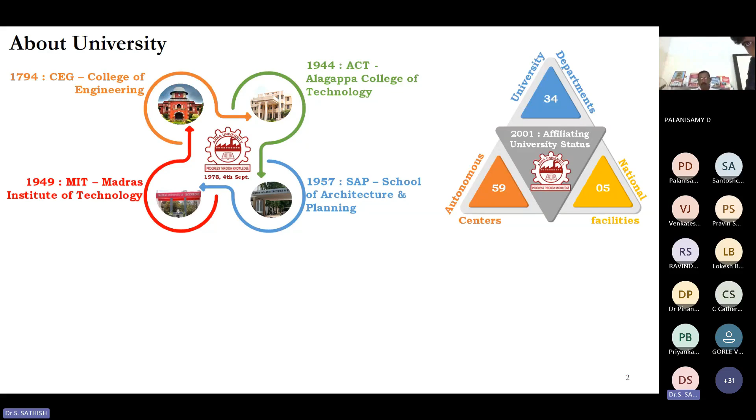Before going into the session, let me introduce our university. Anna University is constituted by 4 different campuses: College of Engineering, Madras Institute of Technology, Alagappa College of Technology, and School of Architecture and Planning. The institution has 34 university departments, 5 national facilities, and 59 autonomous centers. The university is accredited with NAAC A++ and also has a QS ranking.

Coming to the presentation, what is nanotechnology? I hope now people are moving towards nanotechnology. Before going into nanotechnology, let us know what nanotechnology is. When we discuss nanotechnology, each person will have separate definitions under their own perception. Similarly, different organizations have categorized what is nano, what is nanotechnology, and what is nanomaterials. When coming to nanoscale, the British Standards Institution has defined that when a particle size ranges from 1 nanometer to 100 nanometers, that will be called a nanoscale.

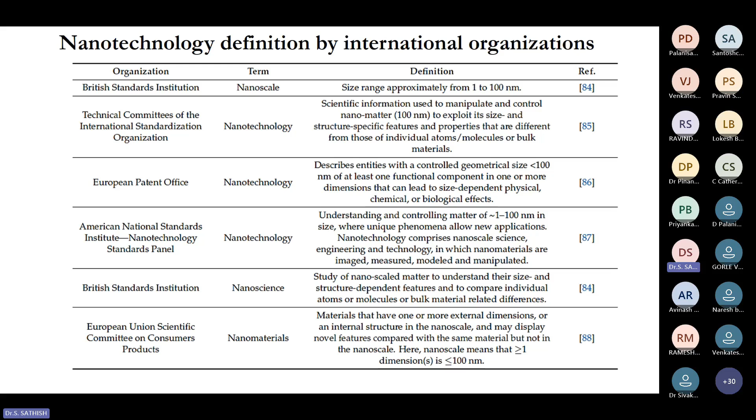In a similar way, the European Commission also defined that an insoluble or biopersistent, purposefully produced material under 1 to 100 nanometer size can be called a nanomaterial. There is also a definition by the European Commission for Novel Foods. So all these bodies define nanomaterials in different ways, but anyhow, it will be in the range of 1 to 100 nanometers.

Apart from that, engineered nanomaterials: if a material is purposefully made in order to obtain a nanometer level, then it is called an engineered nanomaterial.

In the same way, a nano object is when a material has one or more external nanoscale dimensions, categorized under nano object by the British Standards Institution. Similarly, nanoparticle, nanofiber, nanocomposite, nanostructure and nanostructured materials are defined by the British Standards Institution as mentioned here.

So do we think that these nanomaterials or nanotechnology have been developed recently? If you raise this question, definitely the answer is no. Though we have been focusing on nanotechnology and highly relying on it in recent days, people in ancient time periods utilized these nanomaterials in their existing practices, without knowing that it was nanotechnology.

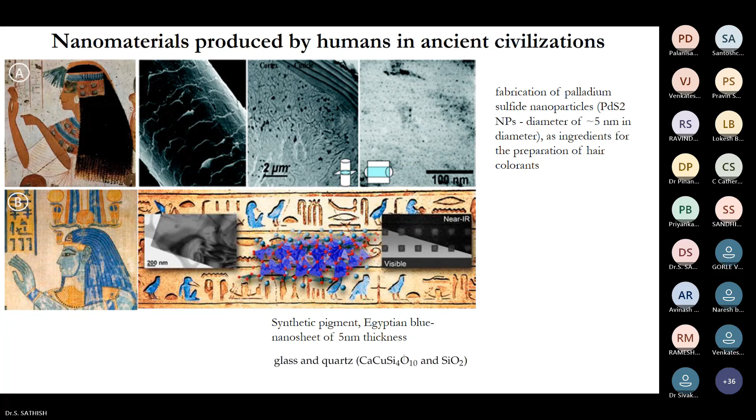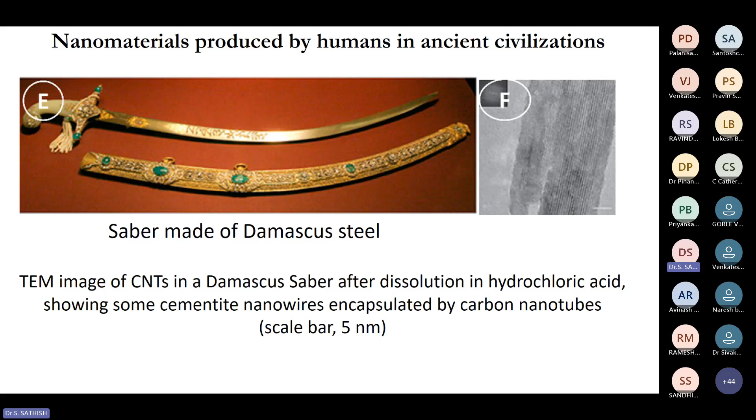Apart from this evidence, you can observe that particle size, nanoparticle size, morphology, and texture highly depend on or highly affect and influence the property of the material, particularly when focusing on functional nanomaterials. If you want to attain a specific property, the nanomaterial is the best choice to create or obtain such specific properties. Hence, these are called functional nanomaterials. Apart from conventional, regular, tailor-made materials, specific material properties can be obtained with these kinds of nanomaterials. This is proven by ancient applications, showing that nanomaterial is the right choice and can be utilized under different scenarios and applications to achieve specific property enhancement.

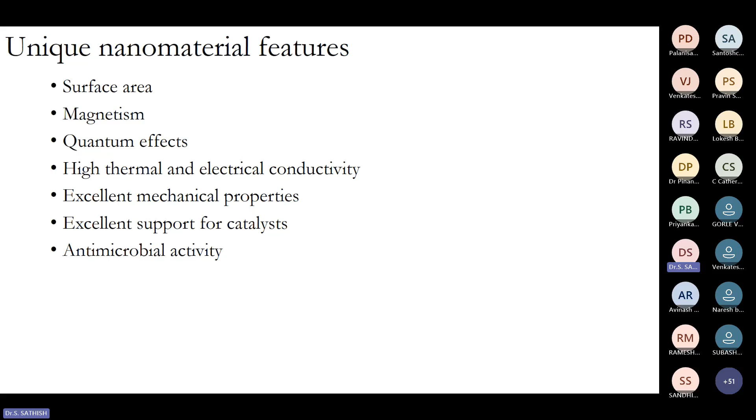Then common properties focused on the creation of functional nanomaterials: general mechanical properties supporting elevated tensile strength, thermal properties, physical properties, electrical properties, magnetic properties, catalytic, chemical properties, and optical properties. These are all properties that can be aimed at improving with the addition of nanomaterials.

Classification of nanomaterials depends on several factors: how a material will be categorized depends upon its structure, then its dimensions, then pore dimensions, then how the nanomaterial is originated, and then its toxicity. Based on these categories, nanomaterials are classified. Structurally, they are broadly categorized into carbon-based, organic, inorganic, and composite materials.

Carbon-based materials are the primary category. These may be in the form of fullerenes, graphene, carbon blacks, carbon tubes, or carbon fibers. Depending on the form, these are all categorized as carbon-based materials.

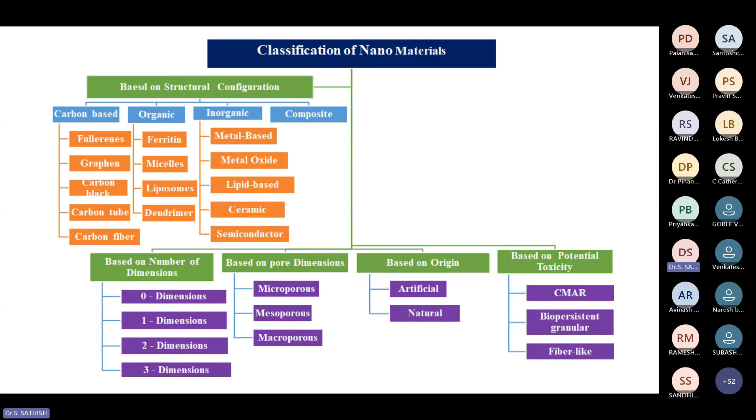Based on origin, materials may be artificial or natural, and they are categorized accordingly. Then there's potential toxicity - how it will behave. This includes CMAR and biopersistent granular and fiber-like particles, which all come under this category.

Though these have certain dimensions, the range is very negligible, hence they come under 0 dimensions. When picturizing 1-dimensional materials, they have X and Y dimensions in the range of 1 to 100 nanometers. Nano wires, nano rods, and carbon nanotubes can be called 1-dimensional.

Then 2 dimensions: it will have a definite length and thickness, showing 2 dimensions, also in the range of 1 to 100 nanometers. Nanofilms, graphene sheets, oxide sheets, and layered nanomaterials can be categorized under 2-dimensional materials.

Then 3-dimensional materials have dimensions X, Y, and Z in a considerable range of 1 to 100 nanometers, where dendrimers, bulk powders, and graphites are categorized under these 3 dimensions.

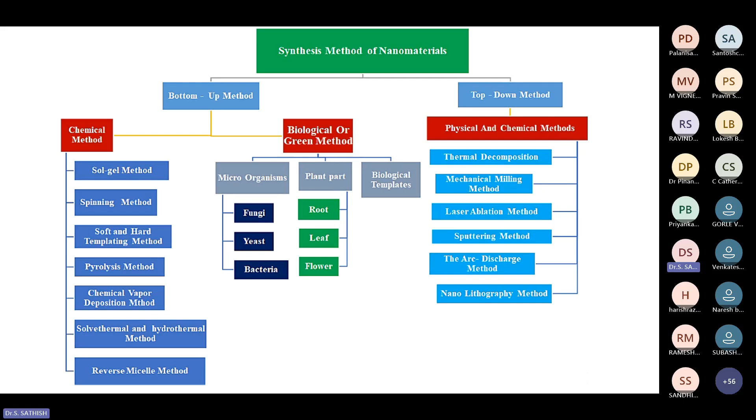So these are all some of the methods utilized under the chemical method process. When it comes to the top-down method, there will be thermal decomposition, mechanical milling method, laser ablation method, sputtering method, arc discharge method, and nanolithography method. These are all some of the methods that come under the top-down method.

So then what is a top-down approach and what is a bottom-up approach? The top-down approach is, if you can visualize, this is a bulk material that will be split into fine particles. That will be called a top-down approach. A higher particle size breaks into a finer particle size - that is higher size to lower size. That pictures the mechanical milling, laser ablation, sputtering, or electro explosion method.

Whereas in the bottom-up approach method, we are going to build in an additive manner. So smaller particles will get stuck together and it will be nucleated, and it will be further developed in order to get nanoparticles, nano range particles. So that will be called a bottom-up approach.

So now we are going to discuss some of the techniques utilized to realize nanoparticles. One of the most familiar methods in engineering will be the ball milling method. This will be a top-down approach method where the particles that need to be converted into a nano level will be taken at a micron level.

So micron level powders will be taken into consideration and this will be put into a ball mill. A ball mill is nothing but it will have rotating chambers called vials. Each vial will have the powders put into it, and in addition, balls will be added together. So why has it been rotated in this way?

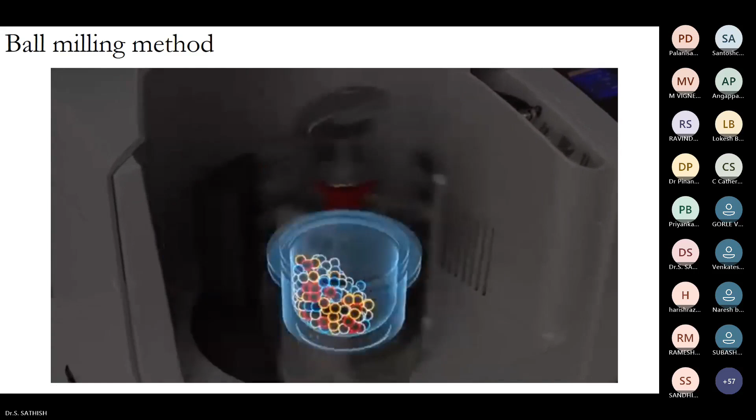Hope this video gives you a better insight on how the particle will be subjected to a centrifugal motion during the ball milling process.

So now the next one will be lithography. This will be utilized in order to create nanostructures. What are the different kinds of nanostructures that can be possible through lithography will be picturized here.

There will be suspended structures. You can visualize that there will be two supporting structures, and in between there will be a structured material made.

So next one will be 3D structures like an Egyptian model. Not only these kinds of structures, any kind of structures based upon the requirements can be made with this method. Then hybrid structures.

So a combination of two different structures can be made. These are some of the structures obtained with the help of lithography, in which the material is focused with the help of an ion beam, and this is implanted over a substrate.

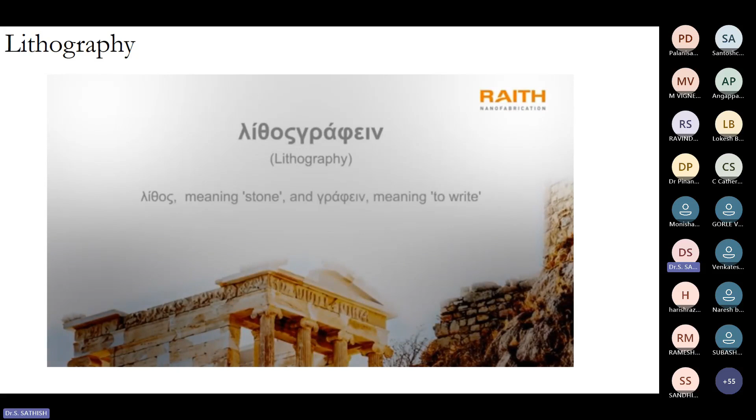With this technique, a stamp is made by carving a pattern into a stone. The stone is then coated in ink and pressed onto a substrate, such as paper. Similar methods are used when making small microscale devices, where a pattern needs to be made repeatedly on wafers.

The two methods used are called electron beam lithography and photolithography. EBL uses electrons to print, while photolithography uses light.

Both methods use an organic material called a resist, which is sensitive either to electrons or light, depending on the material used. A thin coat of this resist is applied to the substrate.

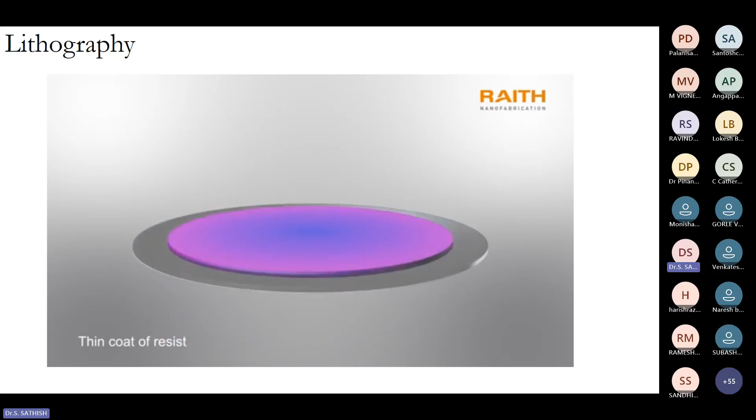In photolithography, the resist is exposed to light through a patterned mask that has been transferred onto the substrate. Wherever the mask allows light to reach the resist, a chemical reaction occurs, in which large resist molecules are broken down into smaller molecules. After exposure, the next step is called developing.

The area of the resist that has been exposed to light is removed by immersing the wafer in an organic solvent. The solvent dissolves only the small molecules that were produced during the exposure to light.

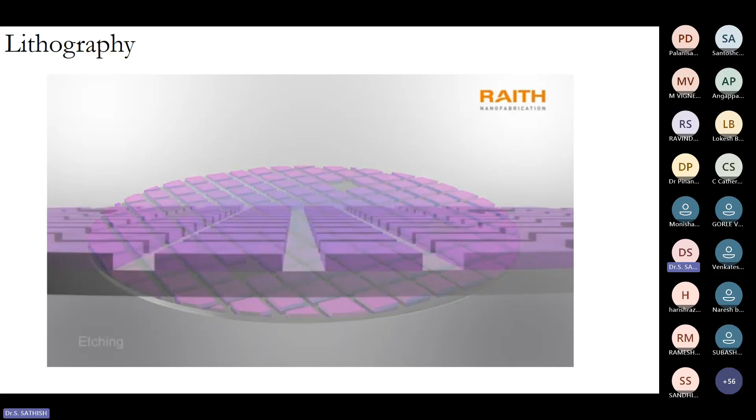Finally, the pattern is transferred onto the substrate using one of two available methods. Method 1 is etching, in which substrate is chemically removed from the pattern area that is not coated in resist. After etching, the remaining resist is removed, revealing the pattern etched into the substrate surface.

Method 2 is the lift-off technique, in which a metal layer is deposited over the whole of the wafer. The resist is then removed, taking the metal layer with it. The only area that now has a metal coating is the desired pattern, where the resist had previously been removed in the developing step.

Electron beam lithography uses the same process scheme, but a focused electron beam is used for exposure. The beam is accurately directed to positions on the wafer to form the pattern. The electron beam exposes the pattern dot by dot and line by line, which can be more time-consuming than photolithography.

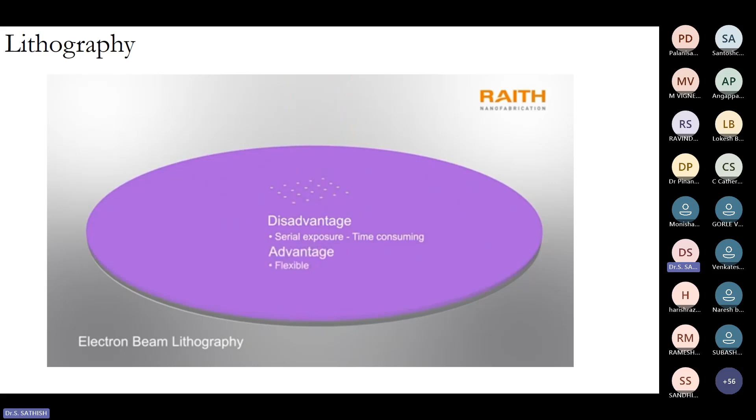However, it is a more flexible system and does not require expensive masks. The focused electron beam also allows feature sizes below 10 nanometers to be generated.

Common applications for EBL are rapid prototyping, small batch production, where electron beam lithography and photolithography are used in conjunction, as well as the fabrication of masks and imprint templates.

Hope you can understand how a lithography process will be made. So two different processes are explained here: one is electron beam and another is photolithography.

Both of these can be utilized to create nanostructures. But it highly relies on how accurate the process is, and the mask required will be different when focusing on photolithography versus electron beam lithography. When moving with electron beam lithography, you can have more precise and accurate structures compared to photolithography.

Then electrospinning - this will be another technique or method utilized to synthesize nanoparticles, particularly to create nanofibers. In this, there will be a syringe type system that helps focus the different materials, depending on what kind of nanomaterials we need to create. Majorly, it will have coaxial nozzles.

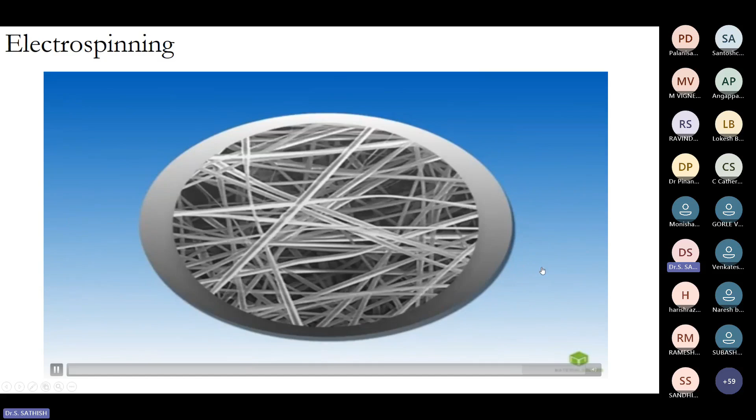So hopefully you have visualized how a material will be pumped from the syringe and moved to a cone, then made into fibers, and then collected on the collector plate.

So the next one will be your sputtering method.

In such a way, the nanoparticles will get coated over the substrate - this is the sputtering method. The video will give an insight on how sputtering happens.

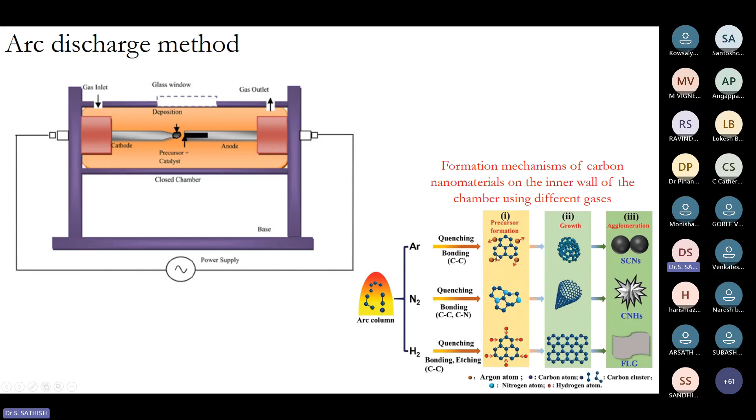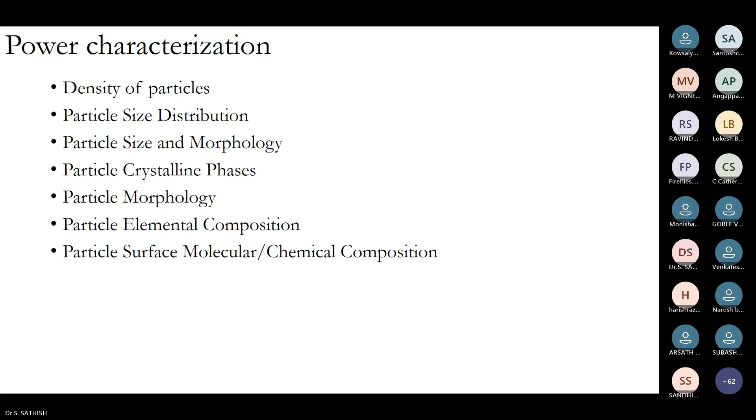So when it comes to density of particles, why do we need to understand these densities? It depends upon the density. If the material has a higher density, when it is subjected to additive manufacturing and poured over layers, these particles will settle at their respective position when forced or poured over a layer during powder bed manufacturing.

If the material doesn't have the required density, what will happen? It won't get filled in a uniform way, and there will be particle gaps that result in the production of porosity, with a very least amount of packing density. The entire surface that needs to be packed off and filled will not be properly filled, resulting in reduction of packing density.

In what way will this affect the part? This will result in the generation of porosity in the part you are going to make through powder sintering or powder additive manufacturing. It will also affect the green density, meaning there won't be proper consolidation between the particles when subjected to particle sintering. These are all the things that will affect the additive manufacturing component.

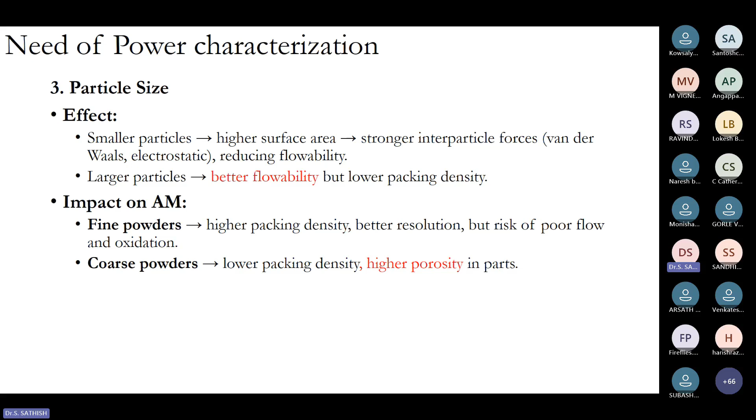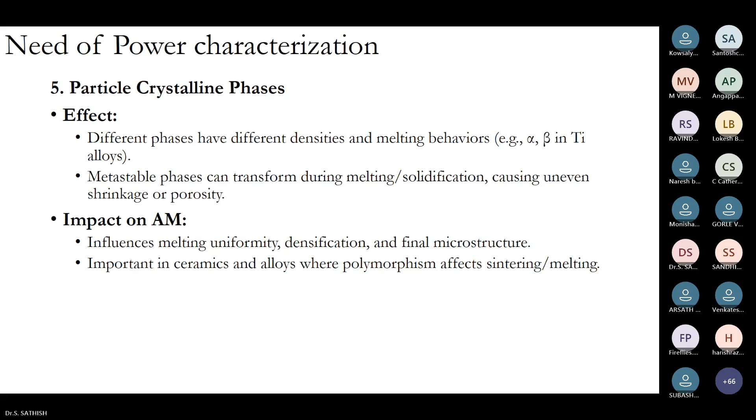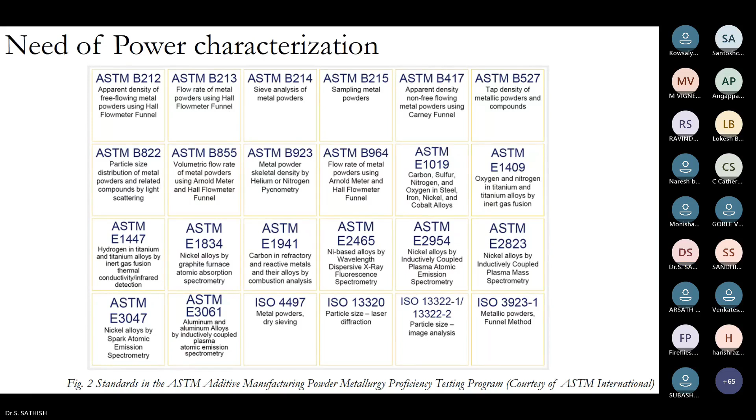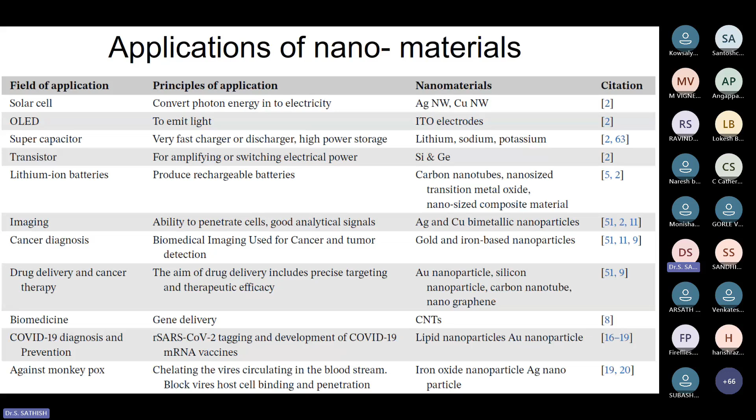Gold and iron based nanoparticles help diagnose cancer and tumors. Gold particles, silicon particles, and carbon nanotubes are utilized in drug delivery systems, cancer therapy, and medical industries. These are some specific application materials used in specific applications.

In the food industry, titanium dioxide is utilized. Then silicon oxide, zinc oxide, copper oxide, and magnesium nanoparticles are utilized in the agricultural industry as fertilizers, as antibacterial materials, and in high sensitivity sensors.

In all domains, it has applications in displays - carbon nanotubes are utilized in displays to create pixel-size level displays - in construction, cutting tool materials, energy sectors, and textiles. So in different domains, nanomaterials are utilized to enhance material properties.

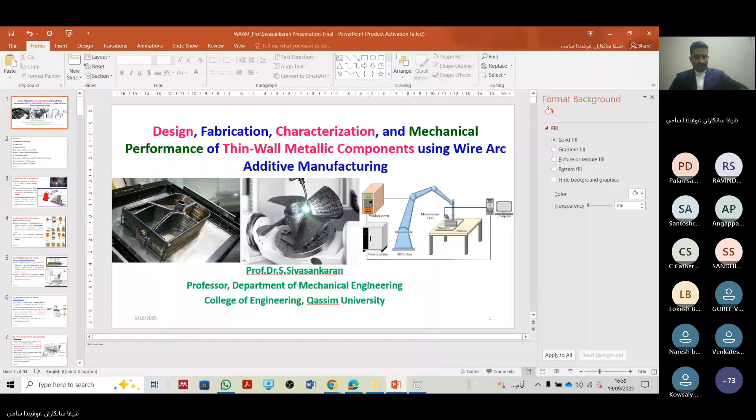Yes, yes, yes. Yeah. Okay. Right. Okay. Good.

So today I would like to share about my expertise and experience related to design, fabrication, characterization, and mechanical performance of thin wall metallic components, which can be produced via wire arc additive manufacturing.

Everyone knows that nowadays additive manufacturing is completely changing the advanced manufacturing sectors. Why? Because whatever complicated product you want to produce, either in the medical field, mechanical field, automotive component, or aircraft component, we can easily produce it via additive manufacturing.

Actually, it is not a new technology. In olden days, we used the additive manufacturing concept to make prototypes. But now, once the patents have expired, people are using that invented technology. Of course, there are many additive manufacturing technologies.

Wire arc additive manufacturing can give us a lot of benefits. It is a cost-effective technique, and moreover the deposition rate will be very high. For any large component, especially very thin wall and large components, wire arc additive manufacturing is the best choice.

For example, in a hull or any propeller, turbine propeller, if something gets damaged, we can replace just that particular part only. It is not necessary to replace the complete propeller. So that is the benefit of wire arc additive manufacturing.

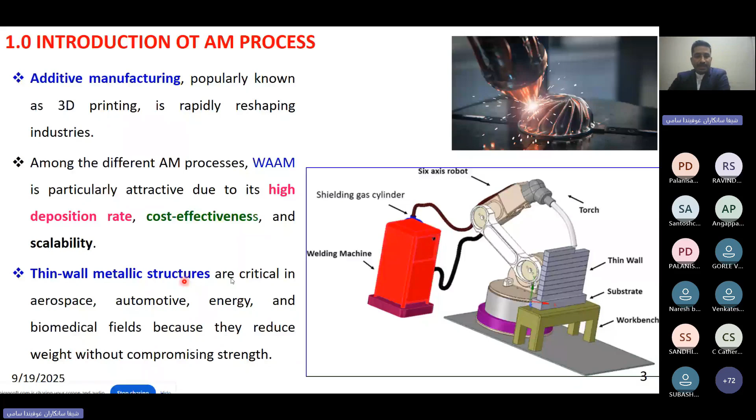As we discussed, additive manufacturing means we can build the product layer by layer. We just have to send the digital file to the 3D printing machines, and then it can start building the component.

As engineers, we should know the difference between additive manufacturing and conventional manufacturing. Additive manufacturing is a bottom-up approach, like the construction of buildings, whereas conventional machining follows a top-down approach, or subtractive concept, where we remove unwanted material from the product.

For conventional manufacturing, we need machine tools, rolling machines, forging machines, and we have to prepare molds - many things are needed. A lot of resources are used in conventional manufacturing processes, but in 3D printing it's not like that. Once we finish printing the component, we can do some heat treatment or post-processing, but apart from that, we can eliminate most of the resources we spend in conventional manufacturing.

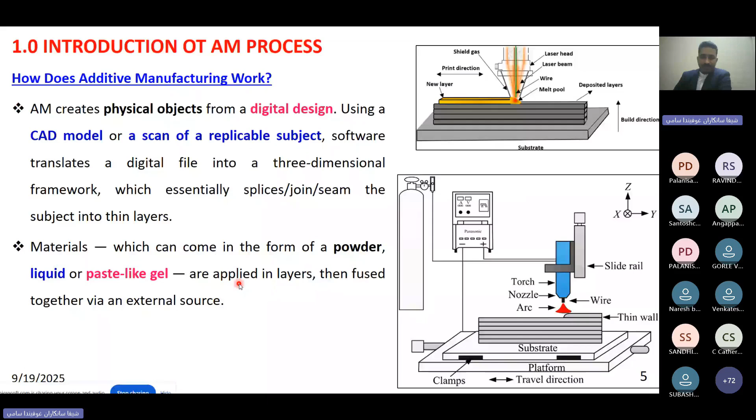Once we do the scanning, we get the CAD data from the scanner. Then the CAD file is converted into NC codes, which are sent to the machines for building the product. In additive manufacturing, depending on the type of machine, the raw material will be in powder form, liquid form, gel form, or filament form. There are different types of printers, and we will take an overall view of this technology.

Nowadays, 4D printing is also coming, and it's one of the best technologies. Whatever performance we expect from the component, we can program it in the 3D printing itself. Then when it's exposed to atmospheric conditions, heat, or environmental conditions, the product will start to perform accordingly. That means after printing, the product will change shape.

People are calling this 4D printing and doing a lot of research in this area. Based on heat, water, light, wind, or electricity, the product will change its shape. We cannot apply this to all materials - for example, shape memory alloys, smart materials, and self-healing materials can use this 4D concept. When a 4D component is exposed to atmospheric conditions, it can elongate, bend, wrinkle, fold, and twist, giving good performance. For example, in structural applications, if a crack appears in the smart material, it starts to identify itself, then expands and joins it. That is the concept of 4D printing.

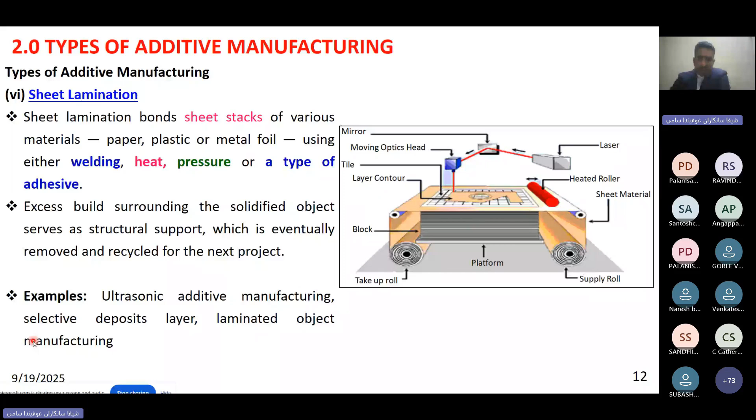There are many videos, and I think you might have watched or learned about them in the previous sessions. Let's focus on our topic.

You know very well that the applications of the additive manufacturing process are very vast. All the aerospace components, automotive components, healthcare and energy sector, consumer products. People are focusing on this area to develop a lot of real-time applications and real-time components.

What are the advantages we can get from the AM process? The best one is design freedom. In conventional manufacturing techniques, we have to design based on the facilities available and the machine tools available, so there is not much design freedom. But here, whatever product we want to design, we can print it. That is the plus point of the AM process.

Design freedoms. We can build any geometry possible in the CAD, enabling complex shapes impossible with traditional methods. That is the plus point of the AM process.

Most aerospace components and bioprinted scaffolds are examples of the AM process. High customization and lightweight components can be easily produced via 3D printing. We can optimize the geometry with less material, whereas conventional manufacturing involves a lot of wastage and scrap.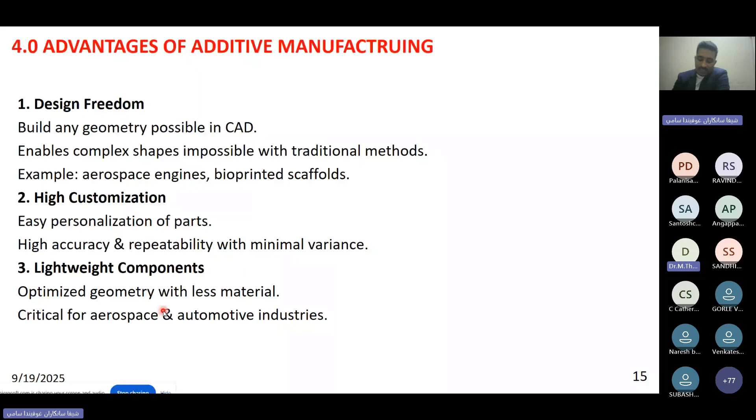This can be completely eliminated by means of the AM process. Further, low maintenance production - whenever there is an order, we can start production. For example, old manufacturing industries usually produce products in large quantities and have to store them in particular places. There will be a cost for inventory and degradation, but all these can be eliminated by the AM technique. That's the advantage of on-demand manufacturing.

We can produce sustainable and less wasteful products. So these are the main advantages of the AM process. And of course, even though you get a lot of benefits, there are some cons also.

We have to spend a lot of money on the machines - highly expensive, at least for a metallic printer you need to spend $200,000 to $500,000. Also you need raw material; for these machines we need specialized raw material. For example, powder has to be made in spherical form - only then can we ensure fluidity, otherwise we cannot ensure it.

Therefore, mostly gas atomization has to be used to produce the spherical form, or at least some spheroidization technique people will implement. It consumes an expensive technique to produce spherical powder, because ordinary powder cannot be printed. Filament manufacturing and wire manufacturing are also expensive techniques.

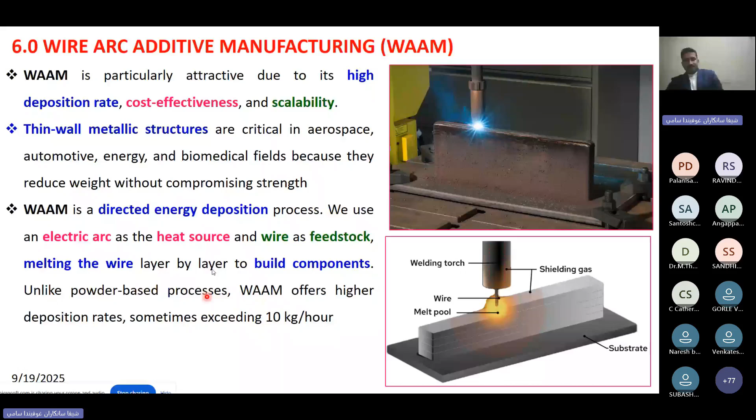Of course, there are some drawbacks. Surface finishing is a drawback in the WAAM technique, and accuracy is not as high compared to laser powder bed fusion systems. In the case of laser powder bed fusion technique, any complicated product can be easily produced via LPBF technique, with more accuracy and good surface finishing.

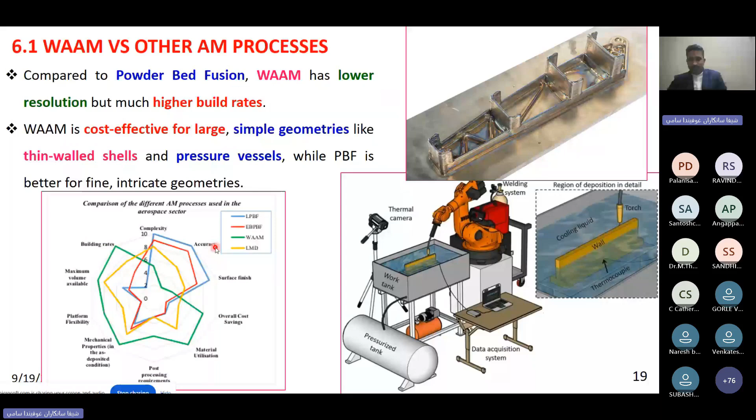Yes, so already I explained to you how the WAAM equipment works.

WAAM equipment consists of robotic arms or CNC gantry systems. There is a robotic arm, and at the top there will be a tipped torch, a welding torch. Inside, we can send the filler, either separately or together. There are IR sensors and cameras, and in order to have a proper feedback system, we can mount sensors. All the feeding system and the shielding gas supply system should be completely synchronized using the computer control systems.

Next, WAAM design aspects—what are the design aspects we have to focus on? Whenever we want to build thin wall cross sections, there are several design parameters we have to account for as engineers.

Suppose the build thickness is too thin—then the wall will collapse. Suppose it's too thick—then material will be wasted. So we have to optimize the thickness of the bead, that is, the wall thickness.

Apart from the wall thickness, there is layer height—now we are talking layer by layer—and bead width. If there is more bead width, there will be deformations along the longitudinal direction, that is, the deposition direction or build direction. There will be some deformations or deflections happening.

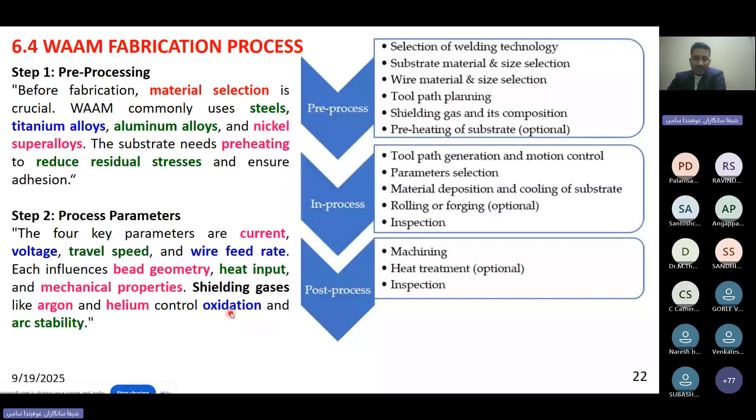Then process parameters - already we discussed current, voltage, travel speed, wire feed, bead geometry, heat input. All of these define the mechanical properties. Then there's selection of shielding gases, at least argon or helium, used to avoid oxidation. Also during WAAM fabrication, we have to ensure arc stability.

Then deposition strategies - this means you can do single pass build, or suppose you want to build large thin wall sections, with 2-3 heads: one head prints, then after some time, the second head prints, then the third - that is multi-pass deposition, also possible in WAAM technique. But before that, we have to ensure inter-pass cooling. If we don't do inter-pass cooling, then building the second layer with more heat causes more deformation, more deflection, and sometimes the weld structure will not be perfectly straight. That is the drawback, something to keep in mind when following deposition strategies.

Then real-time monitoring - whenever we want good build structures, we have to use closed feedback systems. If what's achieved doesn't match the design, we need closed feedback control systems. How can you achieve it? By placing cameras, thermal sensors, and other sensors, we can control the system and produce a good product. That is real-time process monitoring.

Next one is post processing.

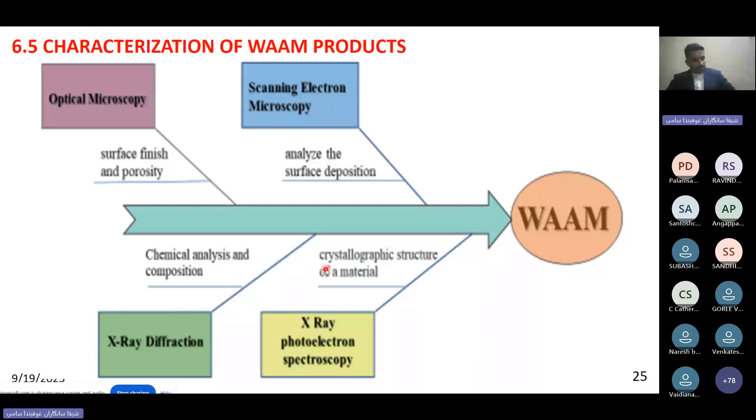One more point in wire arc additive manufacturing: as we build layer by layer, most of the component will have columnar grains and dendritic grains. Because of the build deposition, most of the microstructure usually will have a columnar grain and dendritic grain formed. This is the common microstructure that appears in the WAAM product.

You can see the pictures, SEM pictures. This is layer 1, there is a layer. The red line indicates the interface between the two layers, the interface between two layers. And you can see a columnar grain structure getting formed.

And still if you take higher magnification, you can see some metal carbides, some elements are segregated, presented inside the grain. They are called interdendritic grains. So these are the microstructures usually formed in WAAM processes.

Even with XPS technique, we can identify the presence of oxygen. Mostly whenever we want to do WAAM on titanium, we have to use proper shielding gases and shielding quantity, otherwise there is a pickup of oxygen.

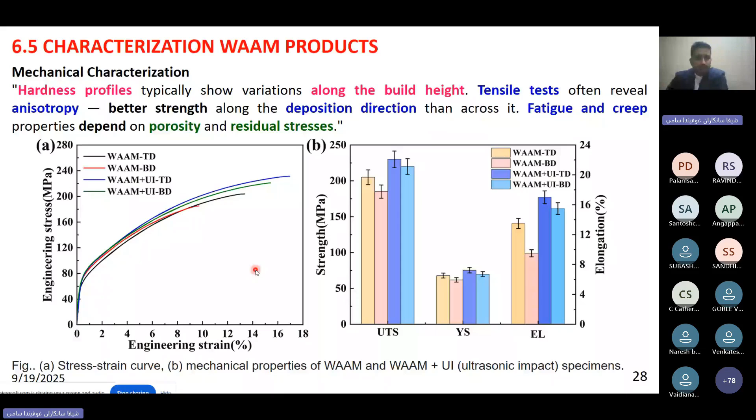Through X-ray diffraction, we can identify what phases are formed in the product. We can easily find out what phases are formed using X-ray diffraction.

EBSD, XRD, and CT scanning - these are the techniques by which we can properly characterize the WAAM product. Through CT scanning, we can measure the porosities, and porosity is not good. As much as possible, you have to minimize the porosity, then only the fatigue life or creep of the WAAM product will be very high.

Mechanical performance - I think most of the concept we have already discussed. As I told you, anisotropy in WAAM means the property will be different with respect to directions. That is a drawback. Layer-wise WAAM will offer anisotropic mechanical properties. The vertical build direction can show weaker interlayer bonding compared to the horizontal direction along the deposition or transverse directions.

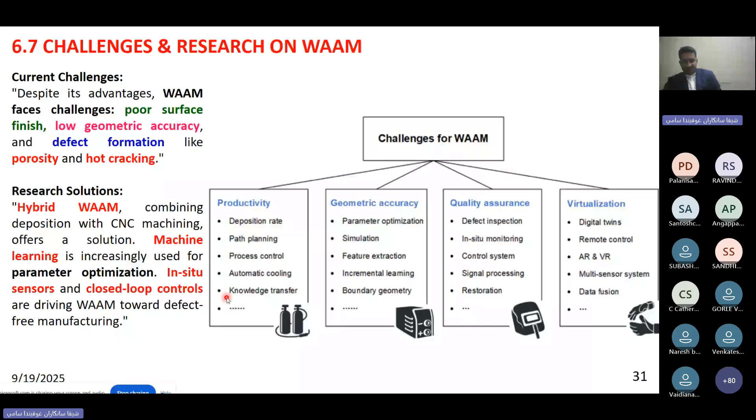Now WAAM also has many categories.

I think 4 or 5 we will discuss it here through this one. Anyway, it's not a new technology. Before we used gas tungsten arc welding, we have used MIG welding, plasma arc welding. From this only electron beam welding developed, and from this only people developed the concept.

So gas metal arc welding based WAAM, gas tungsten arc welding based WAAM, plasma arc welding based WAAMs. This is what gas metal arc welding based system, already discussed. For example, principle of operation of gas metal arc welding operations.

Here, the filler wire has to be passed on the welding torch, connected to the power supply. That means continuous consumable wire electrode has to be fed through the welding torch nozzle. Then workpiece will be placed, that means there is a substrate. It is also connected to the power supply, and there is a shielding gas system also connected.

So based on the programming, based on our design and drawing, the wire will be fed down towards the surface where there is initially no workpiece. The moment it's coming near, the arc will be generated. Once the arc is generated, melt will happen, it will be deposited on the particular area, and immediately there is a synchronous motion, it will move to the next point. So electric current is struck between the wire tip and metallic substrate. That's the gas metal arc welding based WAAM technique.

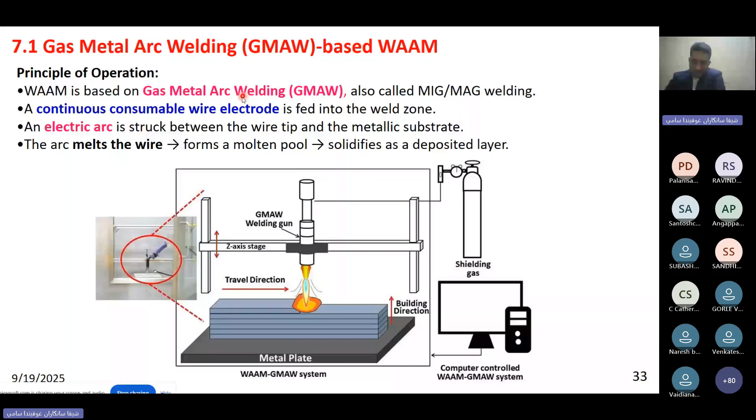So here, the deposition process: first wire feeding, then arc formation will be carried out. For arc formation, you have to use a proper stable electric arc between the wire tip and substrate. Proper voltage and current has to be given to the machine, and we have to properly send shielding gases. If you send too much, it's not good; too less, there's a possibility of deformation, more heat, and more oxygen and nitrogen pickup.

Then arc formation, then layer by layer build up, then finally cooling between the passes, which is called interpass cooling. These are the steps involved in the gas metal arc welding based wire arc additive manufacturing technique. In GMAW-based WAM, the metal transfer mode is important, like in welding. There are basically 4 metal transfer modes.

One is globular mode. That means the filler wire will come and make the arc, then a sphere forms, melt will be formed, and it will droplet out by means of gravity. Usually the droplet diameter will be larger than the diameter of the filler wire. So that is globular metal transfer.

Globular metal transfer has unstable spatter. This will occur at low current, low voltage conditions, where this kind of melt transfer will occur.

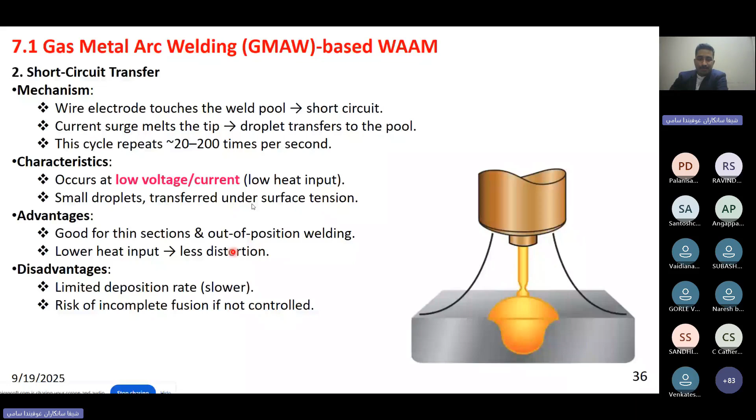Then there's spray transfer - both spray transfer mode and pulse spray transfer mode. This is recommended for the WAAM technique. Here high voltage and current are usually applied to the system.

Spray transfer means because of the supply of high current and high voltage, the moment the filler comes, there is a gap. Immediately the arc is formed and the melt pool is formed. The diameter of the melt pool will be very small compared to the filler wire, meaning the droplet size is smaller than the electrode diameter. Because of the high current and high voltage, the deposition rate will be very high.

Minimum 100 to 200 cycles per second can be achieved. That is the plus point of spray transfer: high deposition rate, deep penetration, stable arc possible. Whenever you want thick sections, not thin walls, we can go for spray transfer, but it also produces a lot of heat affected zones, which is a drawback.

Then there's pulsed spray: here the current alternates high current, low current, high current, low current. Accordingly the arc is generated, and the melt part is forced downward. That's what they call pulsed spray transfer, using pulsed current waveforms. Whenever high current is there, the melt pool is formed; whenever low current is there, it is forced downward. That's the pulsed spray transfer technique.

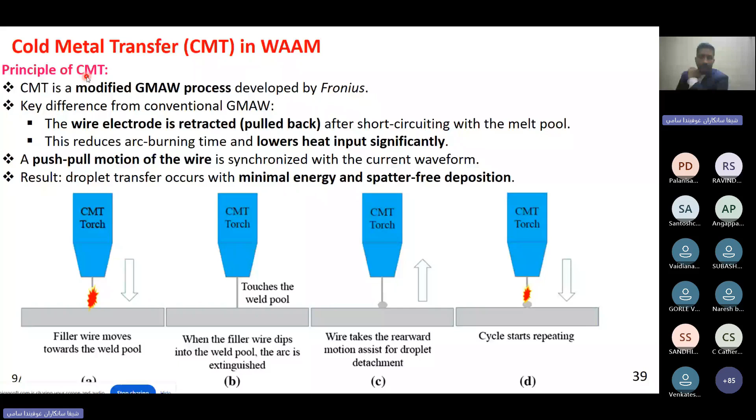I also observed many articles - whoever applied CMT technology in building WAAM products got good quality and good mechanical properties. That's what the next slides show.

In the CMT based WAAM technique, the wire approaches the weld pool and creates a short circuit. The current is reduced rapidly. The moment the arc is extinguished, the current becomes less, preventing overheating. Then the wire retracts slightly up, so the melt part detaches from the wire and is dropped. That is the working of cold metal transfer in WAAM.

They mention the cycle repeats 100 plus times per second, so 100 droplets per second are formed. When compared to other metal transfer technologies, CMT is the best one - low heat input, because it reduces the molten pool, so the heat input spreading is minimized. That is the plus point of low heat input. Also improved surface finishing, enhanced material properties - if we have a good microstructure we get improved material properties - and better for thin wall fabrication, even 1 to 2 millimeter very thin walls can be fabricated via cold metal transfer technology. We also get more energy efficiency from the product.

There are some challenges also: complex equipment, since we need to synchronize the push and pull motion of the wire, so equipment synchronization is somewhat difficult compared to other WAAM equipment. It requires an advanced digital power source and wire control. The deposition rate is somewhat slower compared to other techniques, and the process is highly sensitive.

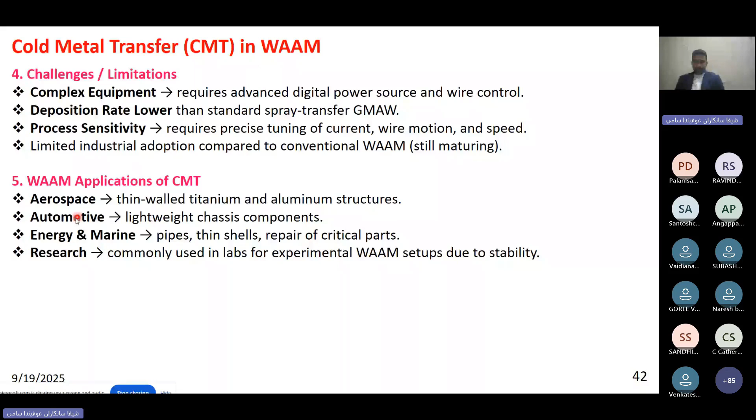Next, gas tungsten arc welding based WAAM technique. It's similar to before, but here tungsten electrode will be used as the electrode. Wire will not act as electrode here, it will only act as a feeder. That's the difference between the previous one and this one.

Here, because of using the tungsten arc, the arc will be somewhat narrow compared to the previous one, and good surface quality can be achieved from the gas tungsten arc weld based WAAM technique. I hope you can understand the basic concept.

Here the challenge is synchronization - we have to maintain a constant gap between the tungsten electrode and the substrate or previously built part, keep feeding constant, and synchronize the gases and travel. All these are highly challenging. But what I observed is we can have good quality when compared to the gas metal arc weld based WAAM technique.

Arc initiation, wire feeding, layer by layer deposition, build deformation - these are the usual steps involved in the technique.

Advantages of gas tungsten arc weld based WAAM: stable arc, high quality achieved, and very good surface finishing - quality product can be produced via this technique. Any material can be flexible because here filler does not act as the electrode. Even reactive metals can be easily built - titanium, aluminum, nickel alloy is highly suitable, and there's a small heat affected zone compared to the previous WAAM technique.

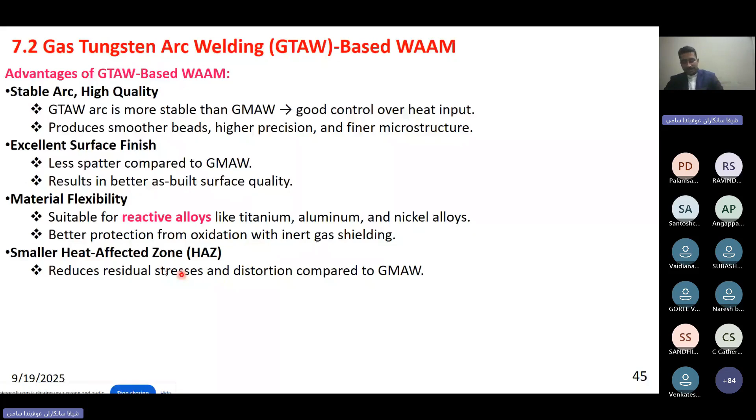Of course there are some drawbacks. Deposition rate will be somewhat lower - for example, 6 to 10 kg per hour can be achieved in the gas metal arc weld based WAAM technique, but here only 1 to 3 kg, making it less suitable for very large builds. There is also process complexity because we need to synchronize the wire, gases, and welding torch, and equipment costs will be high.

Then, plasma arc welding based WAAM technique. Here a constrictive arc will be there, and we have to pass plasma gas through it. Whenever the plasma gas passes through the constricted arc, it gets ionized - this is called plasma gas. There are 4 phases: solid phase, liquid, gas phase, and then plasma phase, the plasma state. At that high state, the plasma state, temperature will be very high.

Only thing - in the plasma arc welding based WAAM technique, we can maintain a constrictive, very narrow arc compared to tungsten TIG welding based WAAM technique or gas metal arc welding based technique. Here we can maintain a constrictive narrow arc by which we can minimize the heat affected zone and build good quality WAAM products. That is the plus point of the plasma arc welding based WAAM technique.

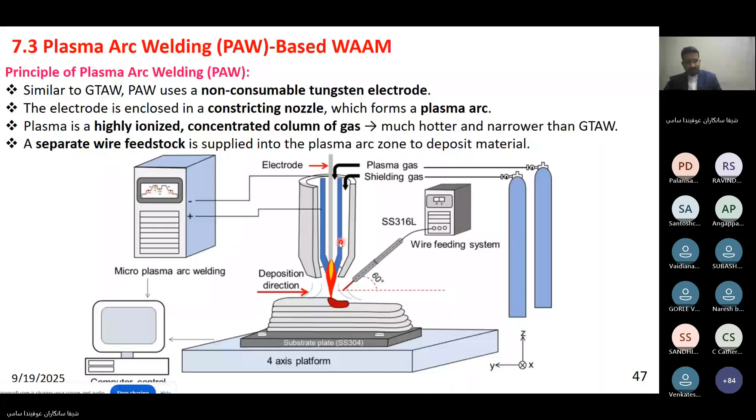Anyway, it's related to plasma arc welding only. Arc generation, wire feeding, layer deposition, controlled heat - these are the steps involved in the plasma arc based WAAM technique. Here high energy density - once the plasma is generated, the temperature will be around 10,000 to 20,000 degrees centigrade.

So the energy density will be very high, almost 3 times higher than the gas tungsten arc weld based one. High energy density can be achieved, and moreover we get a narrow arc, narrow droplet - that is good for the product. So better control, precision, good surface finishing, lower distortion and heat affected zone compared to the previous technique. This is the plasma arc welding based thing.

Of course there are some drawbacks: lower deposition rate, equipment cost will be more, and the process will be somewhat complicated. Applications are very wide. Then multi-wire WAAM machines are also available.

Multi-wire system is also available. With single wire feeding, there are some drawbacks we have observed in the WAAM technique, so for that we can use a twin system - we can feed 2 wires in a single nozzle, or use 2 nozzles. We can have two nozzles mounted on robotic arms, separate robotic arms, and we can synchronize them.

Okay, so that's the multi-wire arc based WAAM technique, by which we can improve the deposition rate. So building will be very fast, and whatever alloy, suppose any new alloy we want to develop, thin wall cross section, or we want to build a metal matrix composite based thin wall, we can able to build it.

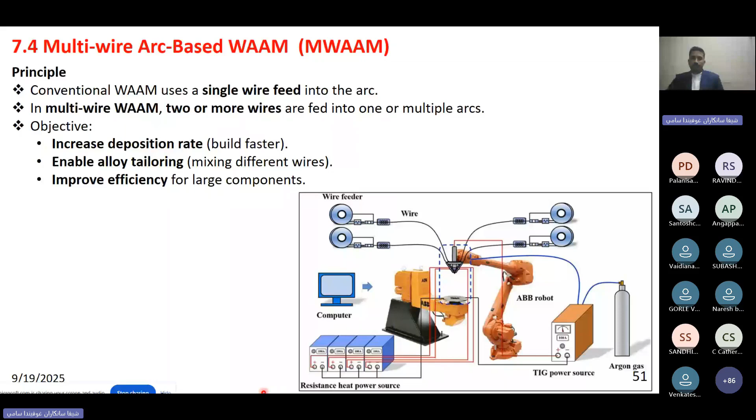There are many categories. Tandem wire based technique - two wires can be fed into the same molten pool. That is what tandem wire WAAM technique is, two wires passed through a single nozzle. Here deposit rate can be 15 to 20 kilogram per hour, whereas for single wire it's 10 kilogram. So the deposit rate will be high, almost double.

That is a plus point of the tandem wire WAAM technique. Or cold and hot wire - one wire passes through the nozzle and will act as electrode, the other wire we introduce as secondary, we can call it cold wire. This is another technique. Hot wire usually passes through the nozzle, connected to the power supply, and acts as electrode. The other wire acts as cold wire. By this we can improve the deposition, or customize the alloy systems. That's the cold and hot wire feeding system.

Dissimilar, different alloy wires can also be fed together, or twin torch, two welding torches can also be used. These are different types of multi-wire arc based WAAM technique, as you can see in the sketches. Wire feeding, arc generation, droplet, solidification - these are the steps involved, same as before. So high deposition, alloy flexibility, tailor-made composition can be achieved.

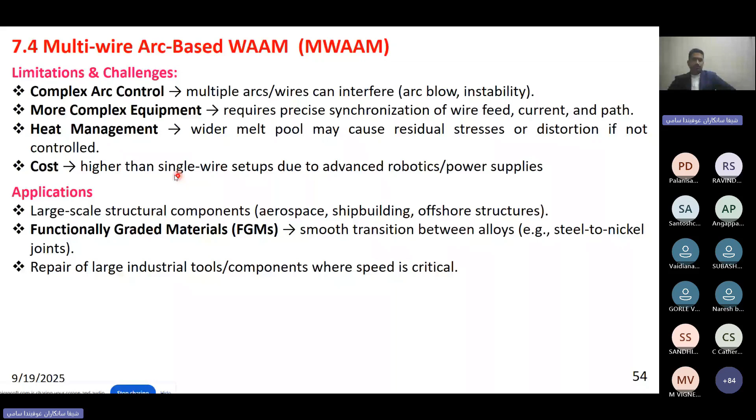Please understand that any product, any thin wall cross section can be easily made through the WAAM technique, because we are using a multi-axis robot arm, so it's flexible. Whatever the orientation based on the drawing, it can tilt and build the product. You have also seen the video.

Next, we'll focus for a few minutes on development of metal parts via the WAAM process. This depends upon the material. Some researchers faced issues - I read some articles and highlighted some points. Some people built titanium alloy, and as I told you earlier, titanium alloy, steel-based alloy, then nickel-based alloy - high-strength materials. Whenever we want to build parts from high-strength material, WAAM is the right choice.

For lightweight, simple components it is actually not useful - we have to use conventional technique only. For titanium alloy, most aerospace components are made from titanium alloy, so WAAM is attractive for large and complex titanium components. Most people observed different microstructure, inhomogeneous microstructure after building.

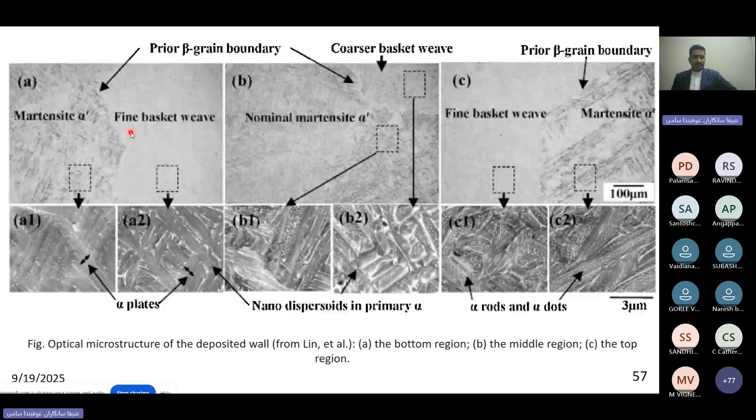Okay, that's what the things, this already explained to you, right. Next, yeah, of course, mechanical properties.

So people, I will show you some tables also. As I told you initially, the build direction has low strength, high elongation. Whereas the strength along the transverse direction, they got a very high value.

Deposit direction, they got high strength, lower elongation. So this alloy also exhibited anisotropic properties, because of the presence of different microstructure in the samples.

You can see several people developed a WAAM product from the titanium 6-4 alloy. Most of them observed columnar structure or lamellar structures, and they tried to compare it to the cast counterpart.

Almost, some people achieved properties even more than the cast counterpart, but the only drawback observed was anisotropic behavior in yield strength, ultimate strength, and elongation.

Then aluminum alloys and steels. Aluminum alloys also can be recommended in the WAAM technique for 2 series, 4 series, 5 series. If you need any large, complicated, thin wall cross section, then only you have to go for a WAAM technique. Otherwise, there is no need to go there.

So otherwise, the conventional technique is always the suggested one. Right. If still people are facing issues with 6 series, 7 series - I think last year I used 6 series.

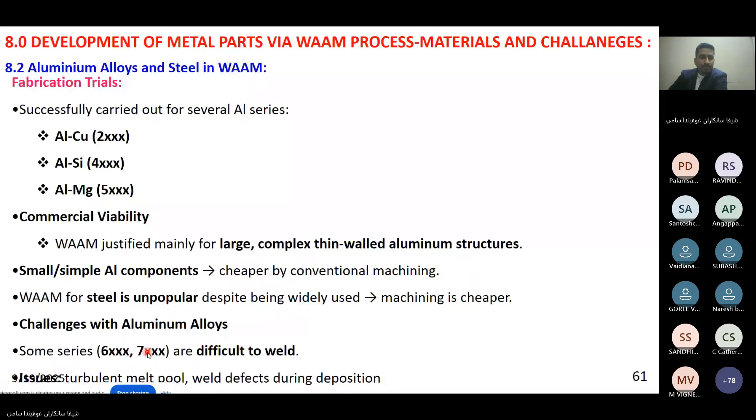Mechanical properties - so people developed several aluminum alloys. I will show you some tables. They observed that in the as-built condition, most of the WAAM products exhibited inferior properties compared to cast or wrought alloys.

But after heat treatment only, they observed good strength with significant improvement.

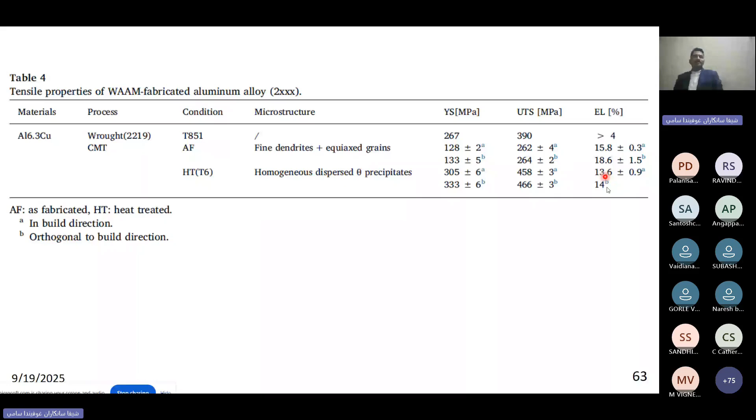Next, nickel-based superalloys - also very important, as you know well. Most aircraft components, space components, the engine is mostly made from nickel-based superalloys. So for which WAAM is a very good process actually.

Okay, so because high strength also we can obtain on it, and the strength of the material will be retained even more than 550 degrees centigrade.

So mostly Inconel 718 and 625 alloys are the commonly recommended materials for aircraft applications, in which people applied the WAAM technique.

So in the nickel-based alloy, mostly people observed large columnar grains, and they observed some laves phase, some precipitated metal carbides also. These are the structures formed: columnar grain structure and interdendritic boundary with laves phases, some second phases, some metal carbides also formed.

For example, in Inconel 625, they observed a columnar dendritic structure with laves phase, metal carbides, and some nickel-niobium intermetallic phases also observed.

So in order to improve the product, people did some post-process heat treatment by which they refined the dendritic arm size - we have to minimize the arms. The columnar grain is also not a recommended structure.

If any material has a columnar structure - what does that mean? Along the direction, it can produce good strength, but if there is any load perpendicular to the columnar grain, the structure will not withstand the material.

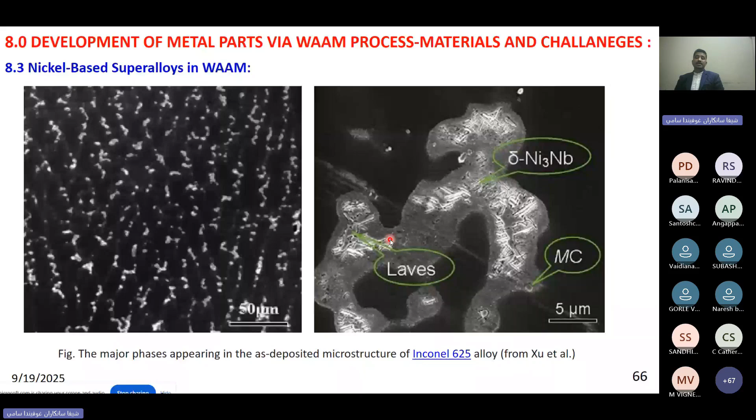Here they observed some Laves phases, some delta phases, some metal carbides. Different phases were also observed. If these phases usually support the strength, but if this phase formation is very high, then it will degrade the mechanical properties. We have to do proper heat treatment, then only we can get the proper mechanical properties.

And you can see in the WAAM technique, through WAAM, in Inconel 718, they achieved 473 megapascal ultimate strength. They also achieved very good mechanical properties from the VAM technique. So now my point is, through WAAM also we can build the nickel-based super alloy product with high strength.

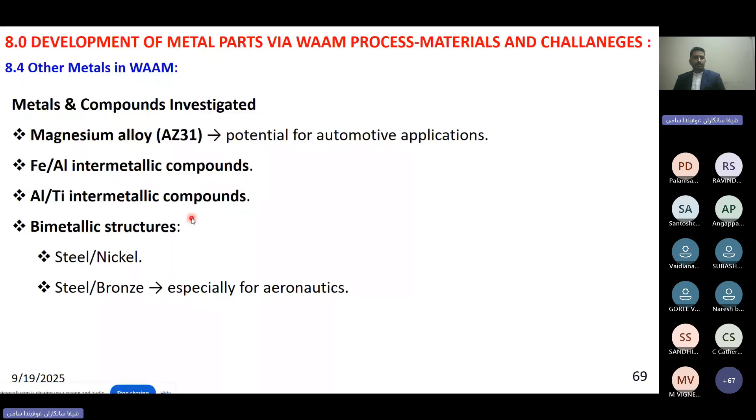So there are many people who have fabricated components from nickel-based super alloys. Of course, there are other metals also, like magnesium alloy - even I purchased recently some magnesium alloys, we are doing some work on that. Or even if you want to build some intermetallic compound - iron aluminum, or aluminum titanium alloy - or if we want to build a bimetal structure like steel-nickel, steel-bronze, for all these applications we can apply the WAAM technique and build the component. There are some people who already applied the WAAM technique for bimetal applications also.

Okay, next question - what are the common defects we observe in the WAAM technique? Basically porosity is the main thing, especially in gas metal arc based WAAM technique. More and more porosity will be formed.

Because of the status, if you are not properly choosing the parameters, more porosity will be there, and high residual stresses also will be there - a high amount of residual stress will be there. And whenever there is high residual stress, obviously there will be a crack. So whenever the build component, the VAM component, has some porosity, some value of residual stresses, some cracking, definitely it will affect the fatigue life of the component. These are some common issues.

Sometimes delamination - that means when we build the layer, it will not stick, it will come out. That's what they call delamination. That is also possible, so we have to try to avoid it. These are the general issues we observe in the VAM technique.

What are the causes? Poor programming strategy - path planning is important. Weld pool instability, wrong parameter selection - there are possibilities. Thermal deformation from heat accumulation - there are possibilities. Environmental factors, shielding gas contamination - if the shielding is not pure, then there are possibilities, or malfunction. These are the root causes for the defects usually found in the VAM product.

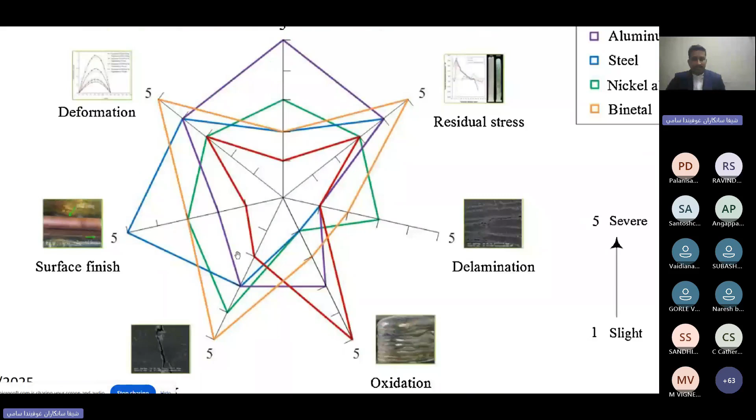And this we already observed - for example, you can see this mapping of different materials. This slide explains, for example, titanium and aluminum - more porosity, less to moderate deformation. Surface finishing - sorry, this surface finishing is low only. I think here, a crack will be less in the case of aluminum. You can map the crack, so this is the mapping observed from different materials.

So here, for example, bimetal - I think bimetal introduces a lot of residual stresses and delaminations, where nickel alloy introduces a lot of delaminations. Where are the minimum delaminations? Titanium, aluminum, steel produce less delaminations. So that's the thing. These are some properties - maybe you can refer my slides. I already sent all my presentation material to the coordinator, you can get it from my slides. Right, so these are what people observed.

That's it. To minimize the distortion, there are a lot of techniques, which we'll discuss in another slide. So part distortion, geometric inaccuracy, layer delaminations, reduced fatigue performance - all these will affect the performance of the component.

What type of deformation will be there? Longitudinal shrinkage during weld deposition along the deposit direction, shrinkage will be there. In the transverse direction, there will be shrinkages. And then bending distortions, angle distortions will also be there. These are the types of deformation usually observed in the WAAM processes.

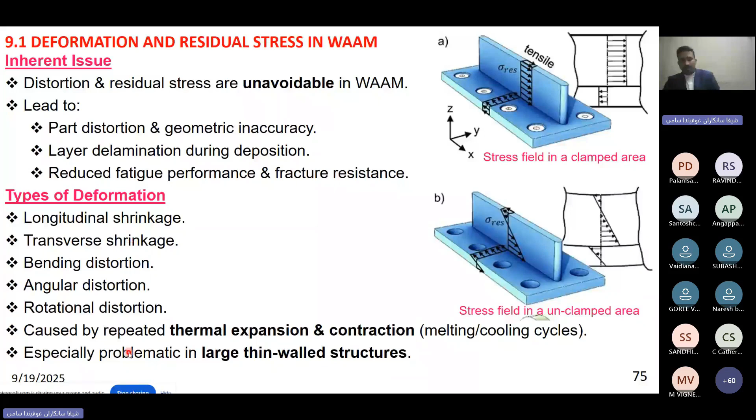When residual stresses accumulate, if the residual stress is more than the ultimate strength, then crack will appear. If the residual stress is in between - above the yield strength but below the ultimate strength - then warping or plastic deformation will occur. So the amount of residual stress matters a lot. Our ultimate aim is to eliminate the residual stresses. If the amount of residual stress increases, then crack or warping formation depends upon the magnitude of residual stress, and the type of defect formed depends on that.

Material observations: for bimetal, some researchers observed the highest residual stresses. That's what I showed you before.

Intrinsic parameters - we have to properly select the weld current, voltage, wire feeding speed, ambient temperature, proper shielding gas flow rate, and proper path planning and programming. These are the things by which you can minimize deformation. Then control strategies: inter-pass temperature control, proper path planning, and post-process treatment - these are some mitigations.

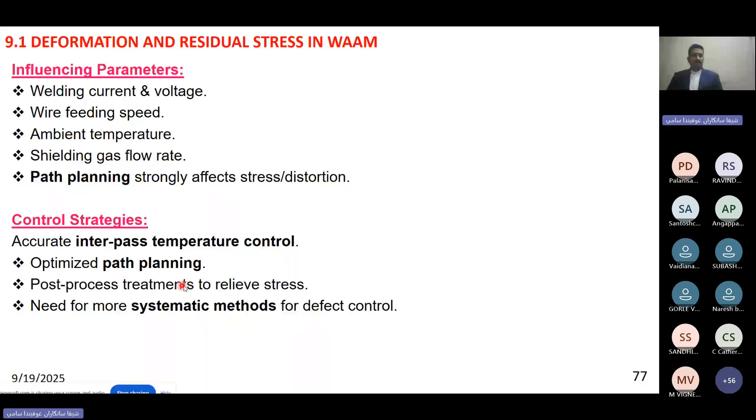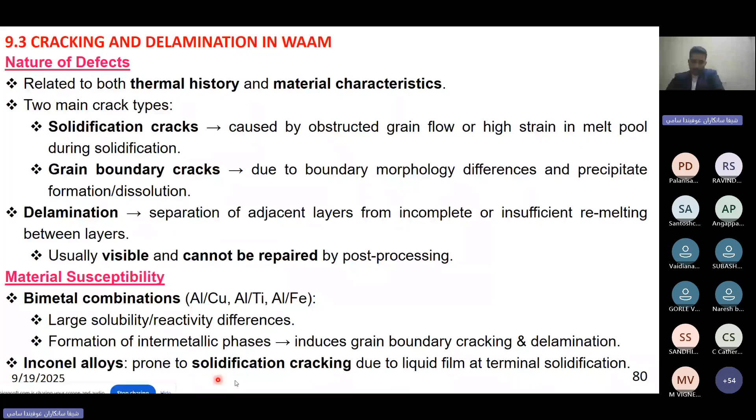If there is insufficient remelting or coefficient of thermal mismatch, then there is a possibility of delamination. These are defects that mostly occur in bimetal combinations, including alloy and nickel-based superalloy combinations. Last year I developed this and we observed delamination, then we found the solutions.

If you are not using the proper cooling rate... if you use the proper cooling rate, we can minimize crack formation. Preheating the substrate, we can minimize the crack and the delaminations.

The last one is post-process treatment.

In order to improve the strength of the mechanical properties of the WAAM product, we can do post-process heat treatment, inter-pass cold rolling, inter-pass cooling, or shot peening and ultrasonic impact treatment. These are the four methods by which we can improve the properties of the WAAM product.

Starting with post-process heat treatment. I read some articles by various authors. For example, after heat treatment, 4% of strength was improved. For aluminum alloy, 78% of strength was improved. For nickel-based alloy, 5% was improved. So you see the improvement in properties after post-heat treatment.

The purpose is to reduce residual stresses, improve the mechanical strength, ductility and hardness, and refine the grain structure. Obviously, the strength of the VAM product will be improved a lot after heat treatment. This is one method.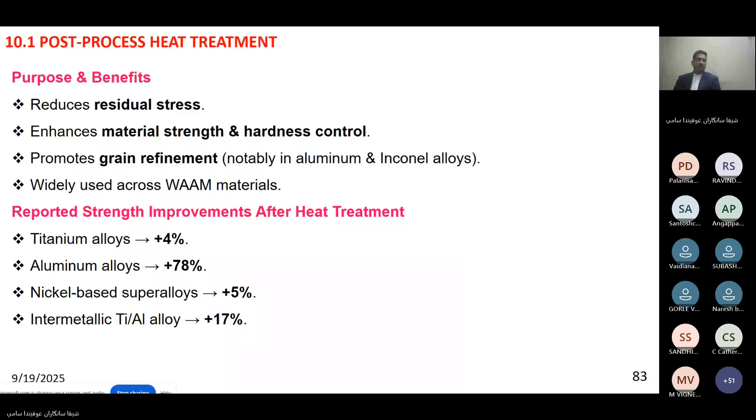There are some key considerations. Depending upon the material analysis, the heat treatment should be selected based on material analysis systems, pre-treatment state, temperatures, and process conditions. For high carbon material, we need to do heat treatment.

Next is interpass cold rolling. After building one layer, a roller will come and squeeze it. Therefore we can avoid the porosity, we can avoid the stresses. That is what interpass cold rolling means.

By this we can minimize the porosity. Once porosity is minimized, the strength will be improved. Many people have observed the improvement of ultimate strength and yield strength after cold rolling. Every layer, another system will do the rolling operation.

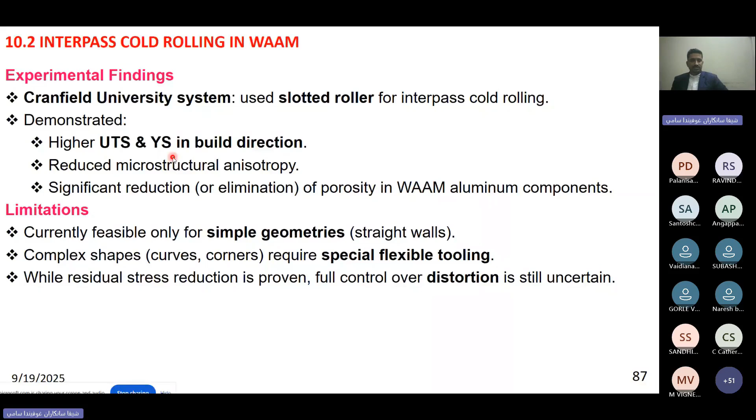The last one is inter-pass cooling, which I already explained at the beginning. Some universities have developed this: after building the layer, there is a cooling system that passes coolant. They do the deposition, then cooling. That's the inter-pass cooling system by which we can improve the properties of the WAAM product.

So we can have less surface oxidation, refine the microstructure, improve hardness, and enhance strength. These are the improvements you can obtain from inter-pass cooling.

There are already residual stresses present. If you apply shot peening, it will introduce compressive stresses, and both will be balanced, so the stress will be relieved. By means of shot peening and ultrasonic impact, we can improve the strength, relieve the stress, refine the grain structure, and improve the performance of the WAAM product.

That's the concept. Some authors have proved surface residual stress reduced by 58% after ultrasonic impact, and micro hardness increased by 28%. But there are some drawbacks: it cannot penetrate the entire thickness of the wall in either shot peening or ultrasonic impact. Only certain layers are affected, for example up to 60 micrometers or 50 micrometers.